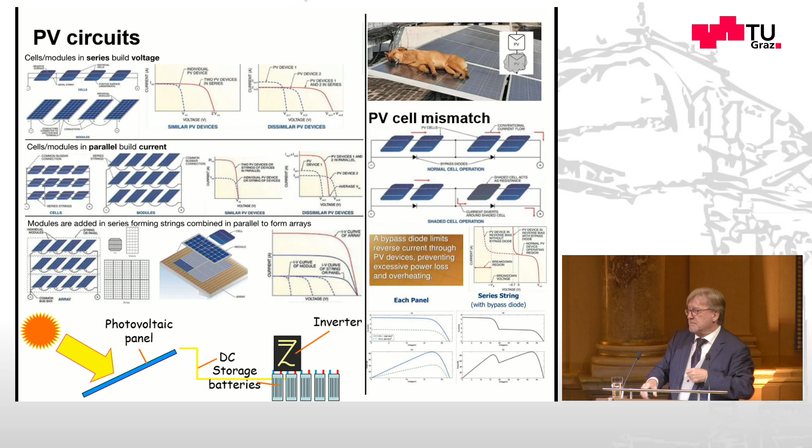Okay. Then just looking at the issue of photovoltaic efficiency. If you take it from a physics perspective, you've a limit of 32% for a single junction, for one exciton per photon, relaxation at the band edge. And that is the limit of conversion of the solar spectrum to electricity. Okay? But you say, you know, solar cells that do 40%, 50%, etc. Because what they do is essentially say that limit doesn't apply.

So you either have multiple gaps, okay, or you have multiple junctions. So the light, for example, is going through one solar cell, producing electricity there. What isn't collected by the cell goes to the next solar cell and produces electricity there. And thus you're having that 32% limit repeated a number of times.

You don't actually have that limit repeated a number of times, though, because you've got an optical loss in the first one, you've an optical loss on the second one, so multiple junctions tend to be not that multiple, because by the time you get to the last one, there's very little light available, okay? Similar things apply, but in a slightly different way for multiple gaps, okay?

Then you can use various forms of concentration. You can use an optical device, okay? Mirrors, lenses, okay? Problem with that is you can only concentrate direct solar radiation, so that's radiation you get on a sunny day. So when you have a diffuse day, I, as you will notice, come from Ireland. Ireland, its main dominant characteristic of the climate is it rains a lot, so it's cloudy, so you have a high diffuse condition. An optical concentrator would not be a good idea, okay?

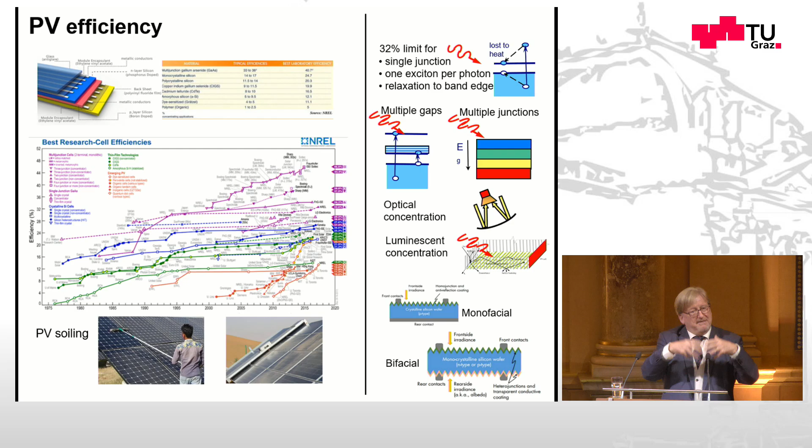Now, interestingly enough, this presents a big sort of standardization problem, because do you say, when you work out your efficiency of a bifacial cell, do you take the front side, or do you take the front and the back side, and then the back side is not really collecting as much because it's facing downwards, or do you say, well, per volume of cell, we're collecting this energy? So it causes existential angst for standardization people when they see a system like that.

But nevertheless, you get the idea of a bifacial cell as another way of effectively making better use of the material. So there's various ways that you can exceed that limit, but you're not really exceeding that limit. You're changing the context of that limit. And that will give you these graphs.

This is a much repeated graph, annually updated from the National Renewable Energy Laboratory, NREL in the US, which is showing you the efficiency increases of various classes of cells over time. And you can see lots and lots of improvement, lots and lots of technologies. Big health warning to it, though.

The real cells you get, even under the particular test conditions that this graph is produced, are between 10 to 50% less efficient. In other words, the half. So the real practical devices aren't quite improving at that rate.

And also, there's a huge range of technologies there, but if you look at real solar cells, they're primarily monocrystalline silicon, some polycrystalline silicon, some thin film, and only in very specialist applications are the other forms of cells taking significant market share. That is likely to change, and tandem cells that have perovskite and silicon and dye sensitized, etc., will emerge over time. But at present, that cell spectrum there does not represent the spectrum of things that are commercially available.

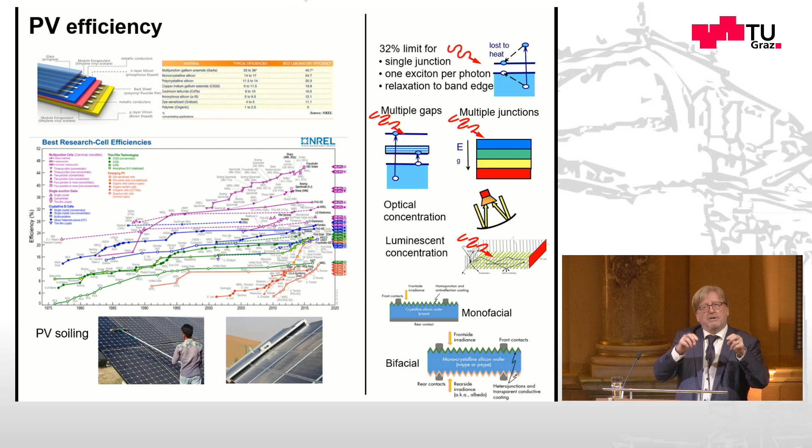The final thing I'd say about efficiency is the issue of PV soiling. You see at the bottom there, on the left-hand side, someone cleaning a PV module with a bucket and a mop. And also you get automated cleaning systems. Now, where solar energy is abundant, it tends to be dry, so it tends to be dusty. So dustiness and high solar radiation tend to be linked. And dustiness will cause soiling on a cell.

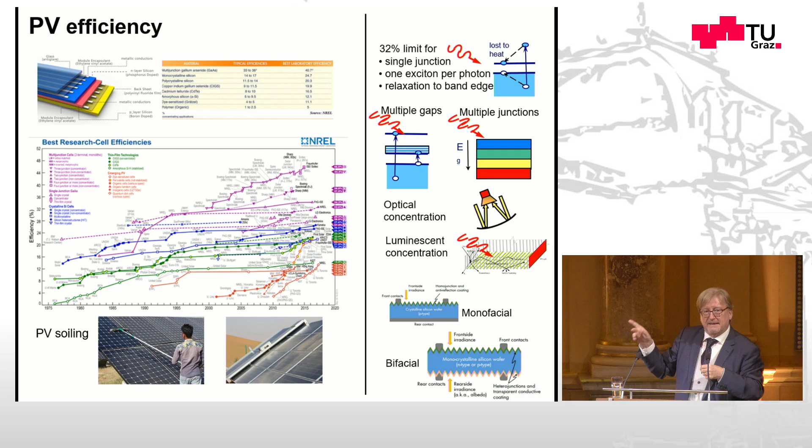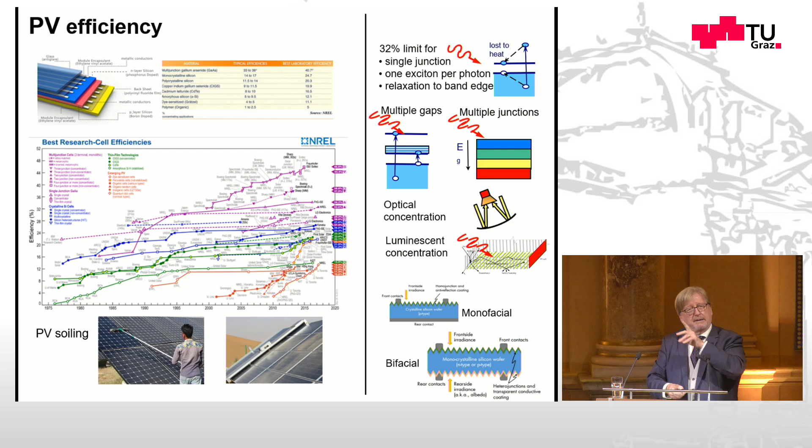Now, wind will remove that soiling, so you end up with a residual level of soil that exists over time. So basically dust on the cell. And you can clean the system, and you can automate that cleaning, but you can also simply oversize the system to allow for that. So again, where that comes in terms of efficiency is another interesting factor. All these things influence applications and context, as you'll see later.

Then the other big area which has influence is thermal management. Solar cells sit out in the sun. A solar cell's efficiency goes down 0.5% every degree Celsius if you look at a crystalline silicon cell. So it's out in the sun, it gets warm in the sun, and efficiency goes down. It's a big issue. So that would apply to the crystalline cell.

Interestingly enough, for dye-sensitized cells or for a thin film cell, it's a much more complex situation. In fact, for a dye-sensitized cell, there's an optimum temperature. So you want to operate at a particular optimal condition. But generally what you want to do with silicon solar cells is try to keep them cool. And that presents a number of challenges.

And the bottom graph, by the way, shows you the variation of temperature with solar radiation. And it also tells you there's a large amount of scatter with that variation. Why that happens is because on a daily basis, your solar radiation has a sinusoidal pattern, but the ambient temperature is displaced by that. It's colder in the morning than it is in the afternoon. The day takes time to warm up. So you get a band because of that effect.

You also get a similar band over the year because the autumn is warmer than the spring. So the year takes time to warm up. So you end up with this kind of band there. And also because the solar radiation has a sinusoidal pattern through the day, when you look at a linear graph like this, you get this kind of bunching effect. So you get that kind of graph of variation of solar cell temperature with solar radiation. And there's several things you can do about that.

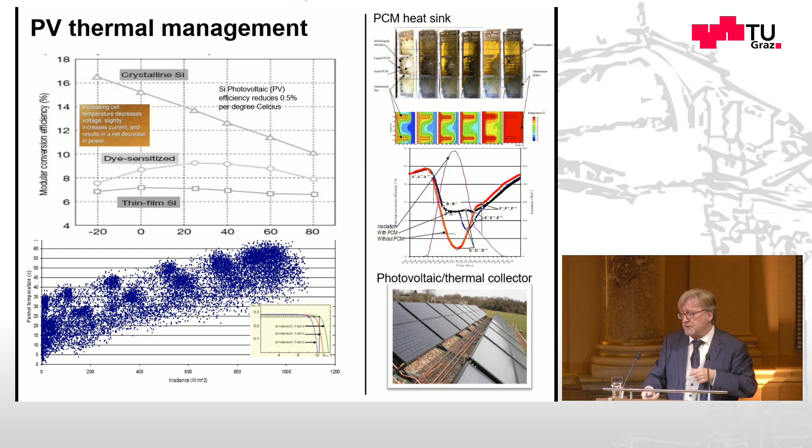In terms of its optimal application, though, you do need an application that both needs electricity produced by the solar cell and can make use of the hot water that's produced. So there's a cost to produce that water. There's a cost of the system itself, and also the cost of operation, etc., pumping the fluid around. So thermal management presents a number of challenges, and we'll come back to that when we look at some of the applications. And then the other thing I would do is energy storage.

Obviously, PV produces energy during the day and not at night. We want energy at night, so you need to store it. So in many PV systems, there will be a battery, okay? But there's many other ways to store, and I look at storage as you've got a where, what, and when question. In other words, where are you going to store it? You're going to store it locally where the PV is, or perhaps somewhere else, okay?

You've got a what question. Do you store it in batteries? Or perhaps you store it in pumped hydro. You pump water up a hill and store it there. Do you store it as sensible or latent heat? Okay, and if you've got, for example, a photovoltaic thermal collector, it's producing heat, so you could do that. Or perhaps you might generate hydrogen and store it as that. So you've got storage options.

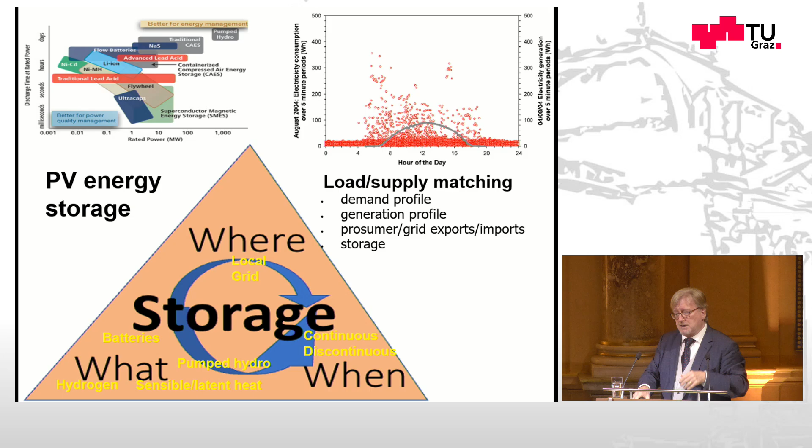And finally, you've got a whole set of issues to do with the matching of load to supply at different scales. What is the demand profile of a particular application? What's the profile of generation? And what's the potential for import-export, what's called arbitrage, in the electricity system? So a whole range of issues come into storage as well, and again, they'll feature in some of the applications.

One of the interesting things about all of this is that solar PV has become more competitive over time. Production volumes, particularly in China, more recently in Vietnam, Malaysia, India, have meant that system prices are coming down.

That has also meant that installation costs are going down. So you look at the little thing on the left-hand side in the graph, which is the cost of solar farms. They're also going down as installation becomes much more standardized. And in favorable conditions, in the appropriate conditions, PV is competitive with just about any other power generation technology.

Now, it'll vary in very particular contexts in terms of distance from grid, the particular climatic conditions, and all the issues to do with load and demand, what are called capacity factors, that I've said. But nevertheless, it is becoming, in most contexts, economically competitive. And indeed, with recent changes in electricity costs, even more so. So we can talk more about that maybe in the questions.

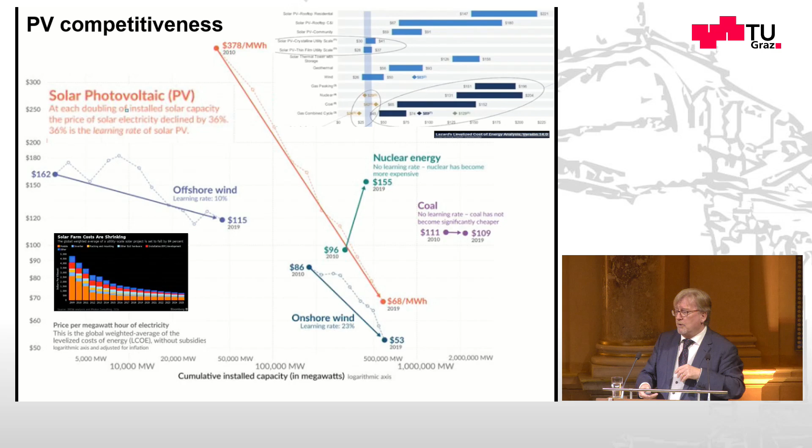The other thing is it's generally environmentally sustainable. And it's important when you look at environmental sustainability to look at the life cycle emissions. If you look at the energy payback of a PV system, it will obviously vary with how much the energy from the PV system is used, how much energy it produces over its lifetime, and also the actual installation energy used, the cost of shipping it from point of manufacture to where it's actually used, etc. Many, many things in there.

But when you add all those up, you look at energy payback periods of around a year. It can be as little as 3 months, it can be as much as a year and a half, but it's that sort of thing, an energy payback period. But your payback period in terms of embodied CO2 emissions can be longer because 70% of a typical PV cell is glass. Glass is an industrial process done at 1,000 degrees C. It has a lot of embodied energy. So your embodied energy payback can be longer than that.

And it's important to keep that low because over your lifetime you're producing operating energy, which has got to pay back that embodied energy. Interestingly enough, it only pays back that embodied energy if the PV is actually displacing fossil fuels. So if it's just adding to the energy production and no fossil fuel gets displaced, there isn't actually a saving of fossil fuels for that embodied energy. So it's important that the systems perspective is also there as well.

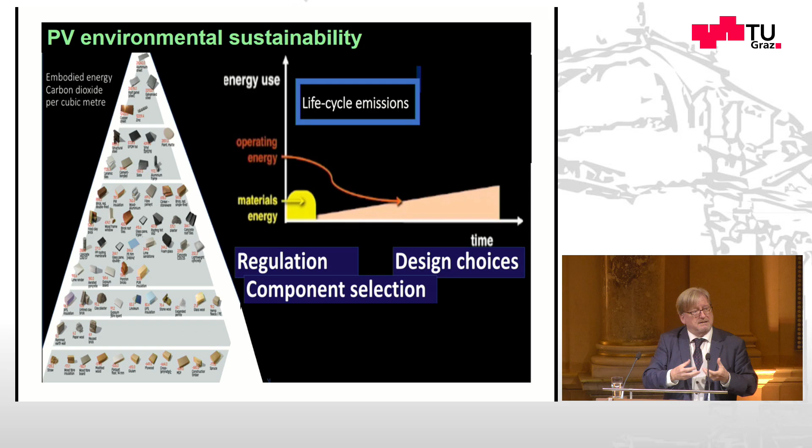Basically, that pyramid there has wood as the most sustainable material and concrete and steel as the least, unless you think about recycling it. And again, the design of the components of the system, the frames, etc., for recycling and reuse, but also design of the PV themselves to self-repair wherever possible, but also to be actually designed for replacement and repair and recycling, because those materials are very difficult to extract and very expensive actually to obtain. Okay.

So, moving on to applications. Applications come in a huge range of sizes. You've got very, very small PV systems that are powering calculators, etc. I'm going to show you lots of those. You've got a lot of off-grid, non-domestic applications. So, for example, telecommunications plants in many countries are powered by PV, through to things that are powering the vaccine cold chain, so the vaccines stay cold all the way to the point of delivery in developing nations and off-grid applications, through to various grid applications, through to very large-scale utility things. So there's a huge range of different systems.

And I'm going to go basically down through a bit of a list of those and then draw things together from there. So we start with PV-powered devices. There is a huge range. Starting off from the top left-hand corner there is my TV controller. Okay, it is PV powered. It has PV cells on the back.

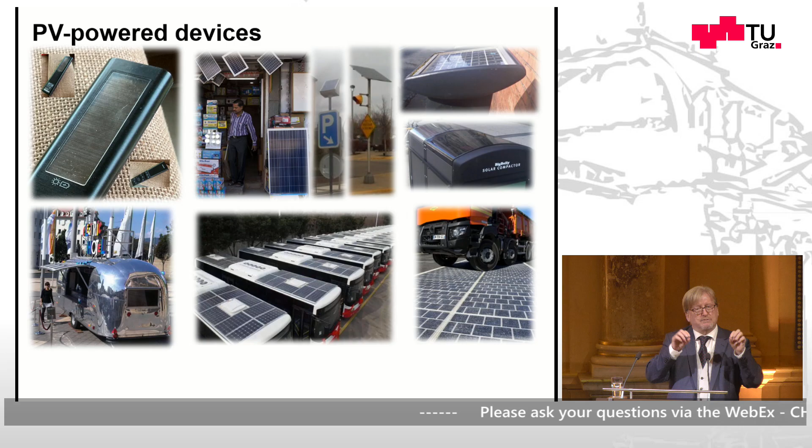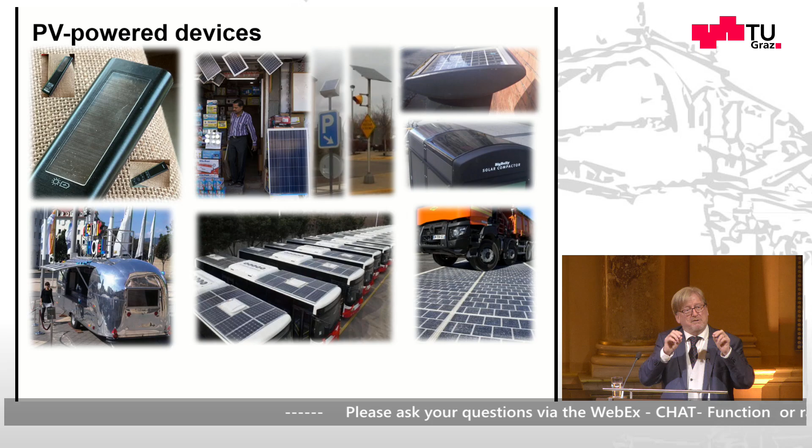And that is the origins. One of the origins of the current use of PV was in two areas: pocket calculators and satellites. And ironically, for the same reasons, the remote autonomous systems. And you want a remote autonomous system; your pocket calculator, your phone, your TV remote, etc., is a big application, and that I think will grow as electronics become more efficient and PV becomes more efficient.

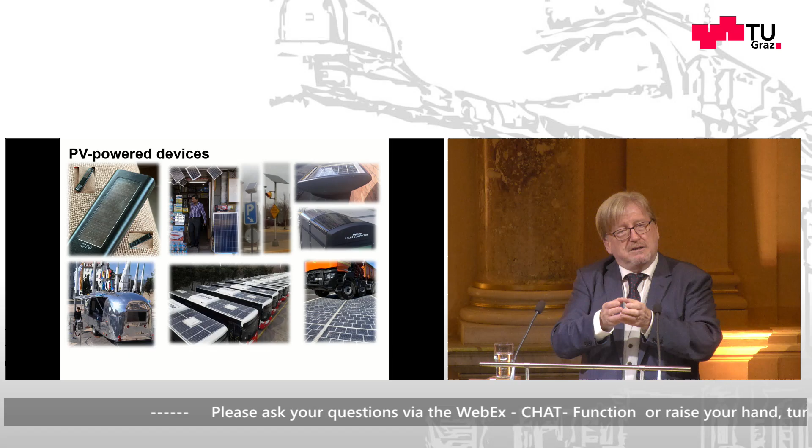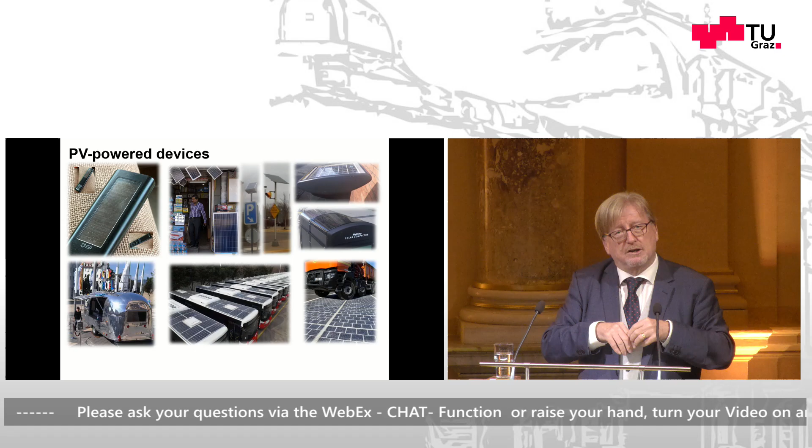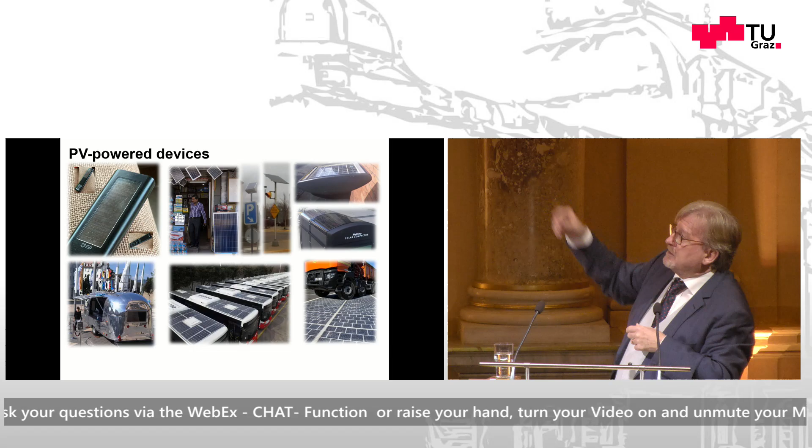You only need to produce the PV energy that can be stored to do the function, so that you don't need to have a match of PV production to end use. You can mediate that through storage. And you can segregate devices' operation so that maybe only certain things happen at certain times. So that niche will grow through to things on the street. See a lot of those, a lot of transport applications.

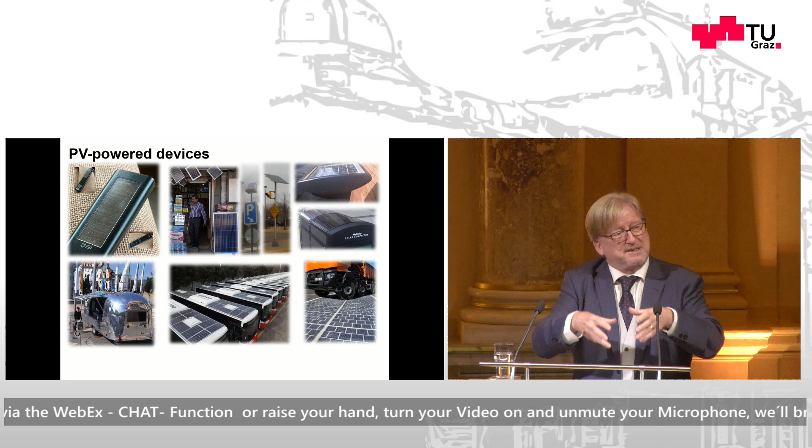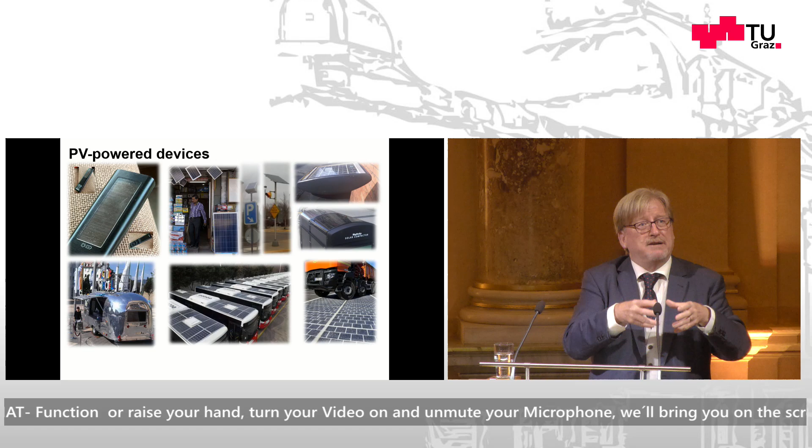And the reason for ones on the street is it's actually cheaper to do PV to power things on the street than dig up the street, put the cables in, get all the permissions, etc. So it's an economic argument. So the reason why you might be using solar water pumping in the Sudan, for example, again, because it's remote and it's cheaper than extending the power lines all the way to somewhere, is exactly the same reason as you will have solar devices in the street in Graz. Okay, it's essentially to do with autonomy and remoteness.

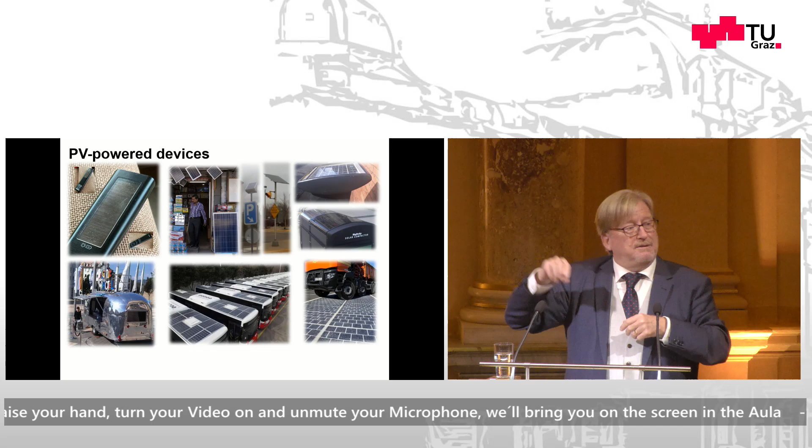Okay, so you see things like solar-powered buses, solar-powered restaurants, paths as well. I wouldn't put a truck on a solar cell, as the picture says here, but nevertheless, paths are a potential application, through to various bits of street furniture. Through, interestingly enough, in the middle there, the second picture at the top, PV cells for sale in India in a shop. And there it's people actually wanting to power their own domestic situation from PV modules they buy retail. Okay, there's a whole range of applications in that kind of area, and an infinity of them.

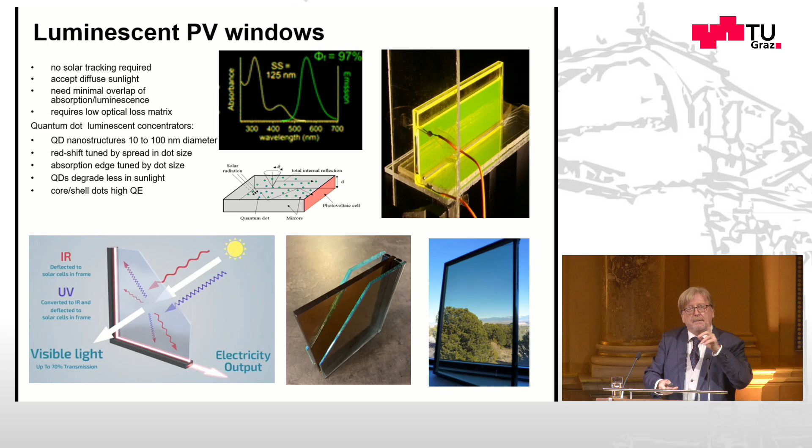Okay? And as you see on the bottom left-hand side there, light comes through the window in the visible range, other wavelengths are transmitted to the edge, and your PV is at the edge. And there are a number of companies commercializing the technology, and you see some examples there. So your PV system is integrated into the window system. Okay, so you say, so what? That's interesting, but not particularly novel. But it leads on to something quite interesting as a consequence, and that's this.

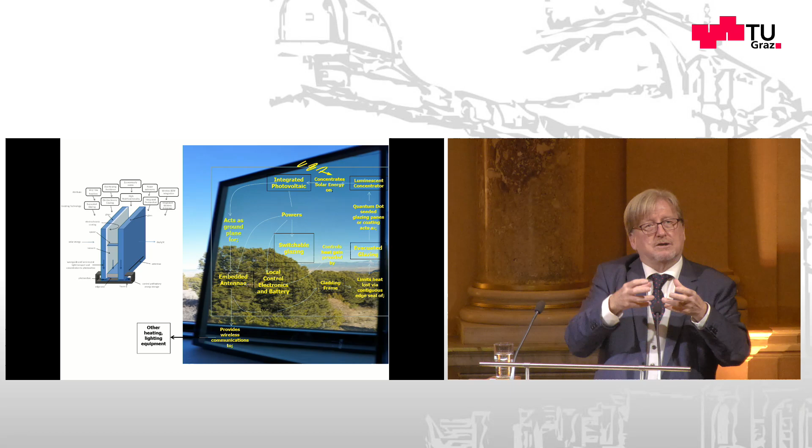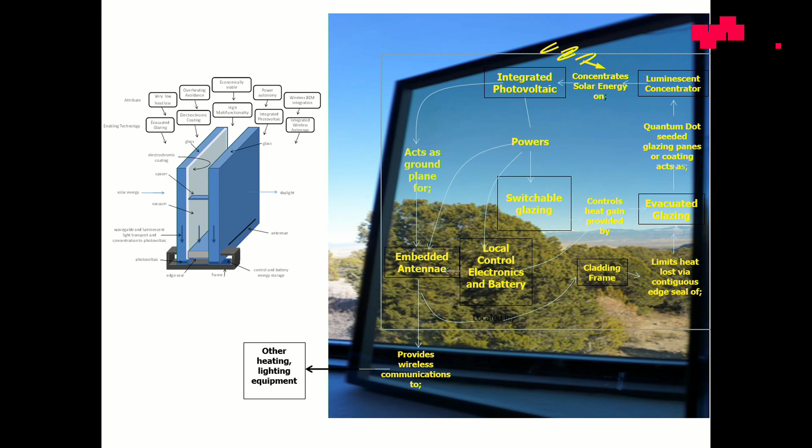In a building, the windows are the point of heat loss, okay? But you want them for light, for daylighting, for vision, for connection to the outside. So you're looking at window technologies now which have very low heat loss. You might have two sheets of glass with a vacuum between them as a vacuum glazing. But then you've got a propensity to overheat at other times, glare, etc. So you then want a switchable component, which you'll maybe switch electronically. And that can be powered by photovoltaics at the edge of the window, okay? That leads to the idea of a window as an autonomous system in itself. That has advantages because you simply install the switchable window and you don't have to power it.

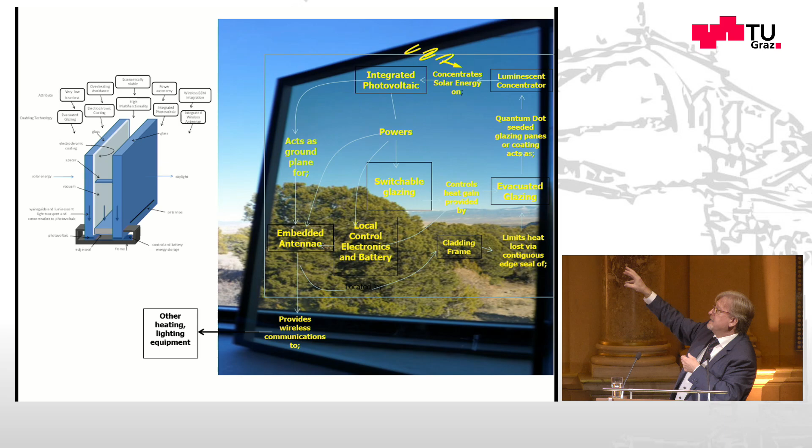So your window will have PV, it will be switchable, it'll be insulating, it'll probably have a battery, and it'll have an antenna. And the reason it has an antenna is when that window switches, it needs to be able to tell the heating system that it needs to come on, or it needs to tell other components of the building which also have Internet of Things components to do things. So you get these complex interactions of the integrated photovoltaic, the luminescent concentrator, an evacuated glazing, a switchable glazing, etc., as an integrated system.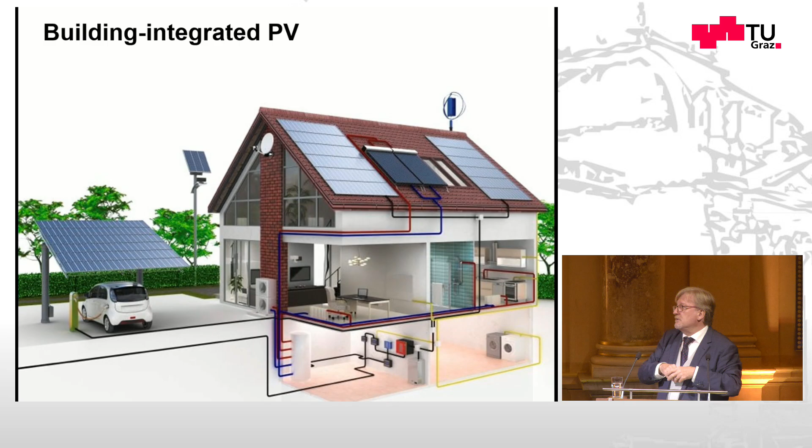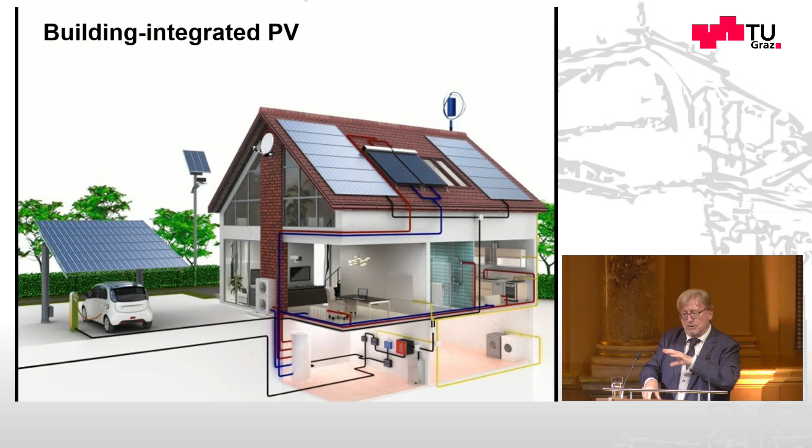In this case, the PV is also powering a heat pump, so it's getting into the heating of the building. And also, you'll notice I put a solar water heater on there, because PV and solar water heating are actually competing with one another for area on the roof. And solar water heating is more efficient than PV for producing hot water. So if hot water is one of your goals, that needs to be seen as part of the system. So you're seeing a range of technologies that need to be integrated in the building.

That leads you on to the idea of the net zero energy building, that at certain times of the year, you're producing enough energy to sell to the grid, and at other times of the year, you're buying from the grid, okay? And that was established very clearly with a lot of national measures to stimulate the PV market, using what were called feed-in tariffs, where the economic viability of a building integrated PV system was dependent on selling the energy to the grid at a particular tariff. That was a market stimulation measure and wasn't meant to be there permanently.

And as those tariffs have been removed, the cost of PV has in the meantime gone down. People are now saying, actually it's better for me to use my PV energy myself rather than send it to the grid, okay? And store the energy, so battery storage rather than being dependent on the grid. But there still might be times when you don't have a load yourself, so you might as well send the energy to the grid.

And that means you've moved from systems being dependent on a feed-in tariff for their economic viability to the owners of those systems proactively managing whether they use the energy or sell it to the grid, so-called prosumers, consumers and producers. And creating that idea of prosumers is part of what building integrated PV actually does. Now, whether you actually do it yourself, or you sell that right to an aggregator who does it for you, or you have some app or whatever, it creates a whole lot of other criteria.

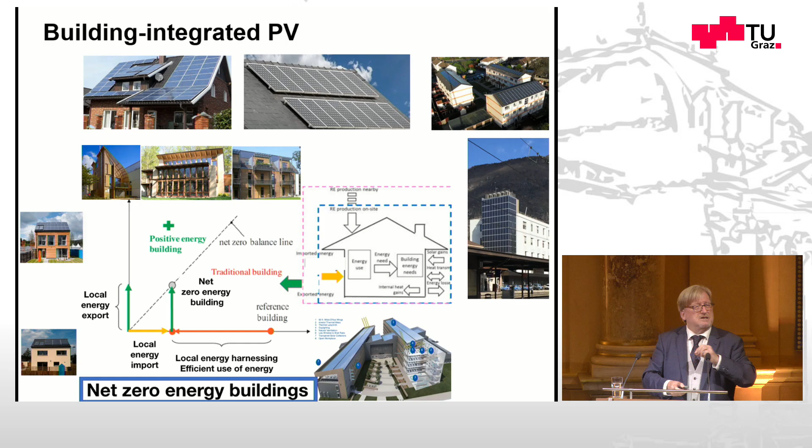The other thing I'd just say on this slide, all these buildings have got, as you can see, PV on them, domestic, non-domestic, different countries, but they're totally different styles. And one thing I would say is that building integrated PV is architecturally agnostic. You can integrate it into any kind of building, and I think there's some evidence of that. And by the way, I haven't shown it on this one because it just complicates matters, but you can also now get PV in a whole variety of colors and textures as well, so all that's doable.

You also have standalone arrays, and they're particularly common as power for electric vehicles. And you see various installations here. Don't have time to go into it, but there's a whole lot of interesting issues to do with the design options of electric vehicle charging stations. What they take advantage of is that solar energy, one of its characteristics, aside from not being available at night, is the low power density. So you distribute the collection of solar energy, obviously, but also it's appropriate to distribute the use of solar energy so that you're not needlessly moving it around and incurring losses in doing that.

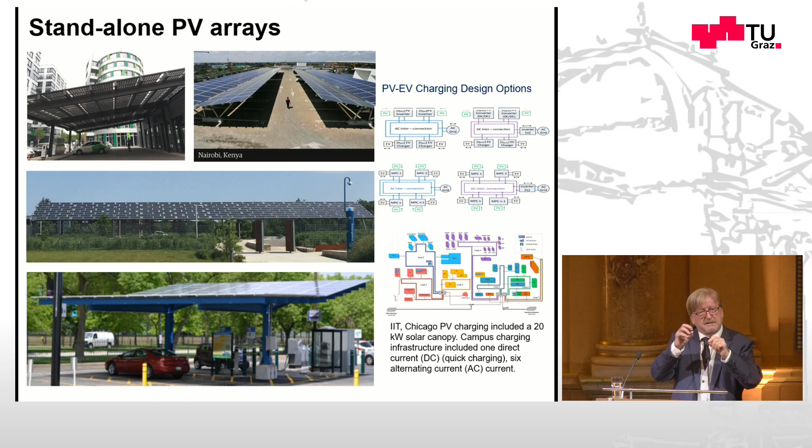So the idea of powering electric vehicles in a range of locations, but then linking that with ideas of perhaps vehicle-on-demand services, so that you take the charged vehicle, means you can optimize the charging profile. So you don't take your own vehicle and charge it, but you link it with vehicle-on-demand kind of services. And then you've got a match of load to service coming through. And many examples here from Nairobi, Berlin, Chicago, and actually up in New York State in the middle there, of different systems of different designs. So that's become a very common application, standalone arrays.

Also quite common is PV water pumping. Again, remote locations, agriculture, etc. And this brings an interesting question, which goes to that where, what and when of storage. What do you store in this system? Do you store the electricity or do you store the water?

Okay, in other words, you pump more water than needed and have a big tank, and as long as you can cope with evaporation, etc., you store the water, you store the end application. And there are pros and cons in particular applications. And interestingly enough, the graph there is a little out of date now.

That was calculations we did for Jordan, the country Jordan, in terms of the economic viability of diesel generators versus PV. And what's happened with the price of diesel is now PV wipes all the other applications out, and it's better to have a PV water pump than any other kind of water pump globally. And irrigation, and particularly provision of water for nomads, etc., is an important part of this kind of application.

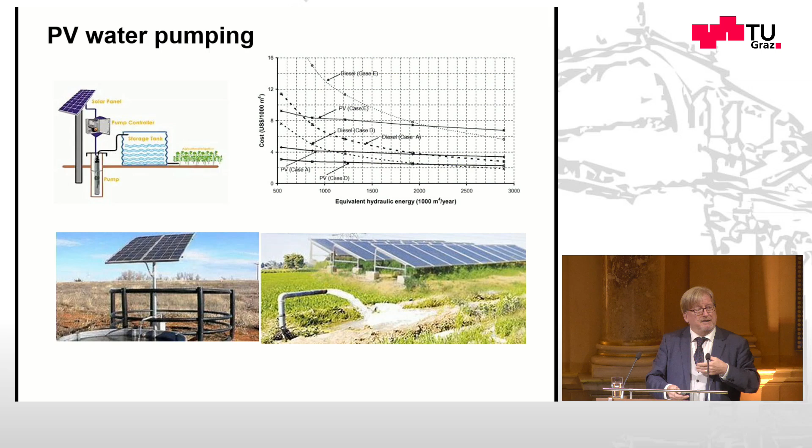And it started off primarily in a developing country context. You'll now see PV water pumping in North America, in Europe, etc. It's a very readily sensible application.

Then you have large-scale grid-connected PV. Lots of it, gigawatts of it throughout the world. The one on the top left-hand side, the largest in the world when I last looked, was in Tamil Nadu in India, but I suspect tomorrow there'll be yet another one somewhere else that's even bigger. And these use vast amounts of land. Their costs have been shrinking because as they get bigger, you get bigger scale, etc.

You need large amounts of reasonably flat land. That large amount of reasonably flat land needs to be near a grid, and you need to have access to the kind of facilities to maintain those systems over time. Okay? But the land is the critical issue. And in many countries, either your land is limited and there's competition from agriculture, or there's competition from housing.

If you think about Japan, for example, there's a spine of mountains and a very thin strip of flat land, so this wouldn't be appropriate for Japan, or South Korea, for example. So other options become available. So that competition for land has spurred a lot of other possible ways of looking at PV, and has led to some quite surprising co-benefits that have emerged.

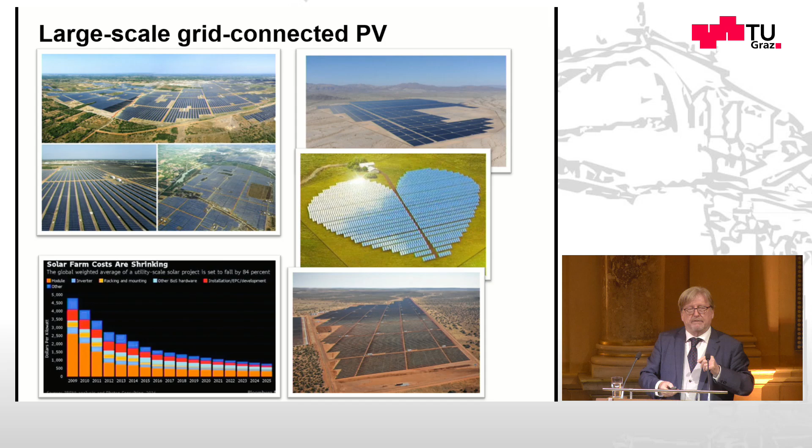To pick a couple of examples, the first one is what's called agri-PV. In other words, rather than your PV displacing your agriculture and covering that land, you're trying to work with the agriculture. It has a number of interesting effects, okay? Your plants are shaded. They need less water. So if you're using some of that PV to do the water pumping, less water needs to be pumped, less water is lost.

You're also, going back to the thermal management bit, cooling the panels. So your PV is working more efficiently, okay? And the cooler panels capture more energy from the sun because they're working more efficiently. Also, when you look through that system, if you take in a greenhouse, there are essentially three kinds of systems.

You can have vertical systems where the tractors go between them. You can have systems that go above and you change the angle, or you can have systems in greenhouses. And many greenhouses are actually shaded, okay, to avoid excessive solar radiation. And now you're both shading, and that shading is collecting solar energy for you to power things.

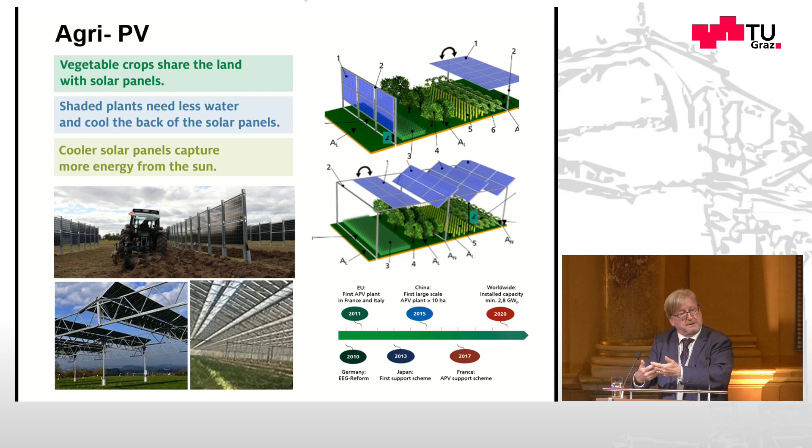So the idea of PV working with agriculture is not displacing the land anymore, but it's actually giving a whole lot of co-benefits, both for the agriculture and much more electricity from the PV system. Another interesting example in a similar vein is floating PV.

And I mentioned Japan. So Japan has a very coastal strip, which is where everybody is, okay? And there's competition for land. So you're not going to have those very, very large solar farms. So ideas of putting things onto lakes, into bays, at sea, etc. Similarly, there's a big program in France, a program in South Korea. I'll come back to that in a second.

So you've seen this kind of system. Essentially, you've got a whole set of floating systems, moorings, a set of converters, and the photos there, you can't really see them, but I'll show a lot of photos just so you see there are a lot of these systems.

These are not unusual in the slightest, okay? The South Korean example, though, is an interesting example of something else which is an issue. A lot of these systems are in one way or another incentivized with, for example, a feed-in tariff, as I mentioned. One of the problems in setting those tariffs, as you noticed from the earlier graph, is that the cost of PV has been going down. So you set the tariff at this level, and the cost keeps going down, and people make a lot of money. So it's important to set those tariffs very tightly.

And there's a lot of floating PV in Korea because they set the tariff at a particular level that made it very, very attractive indeed. So you can artificially create markets in this area. The same happened, by the way, with smaller scale, but still solar farms in the Czech Republic and in Spain. Tariffs were set at the wrong kind of level. So when you look at incentivization, it's an interesting one in terms of the unforeseen consequences of doing certain things.

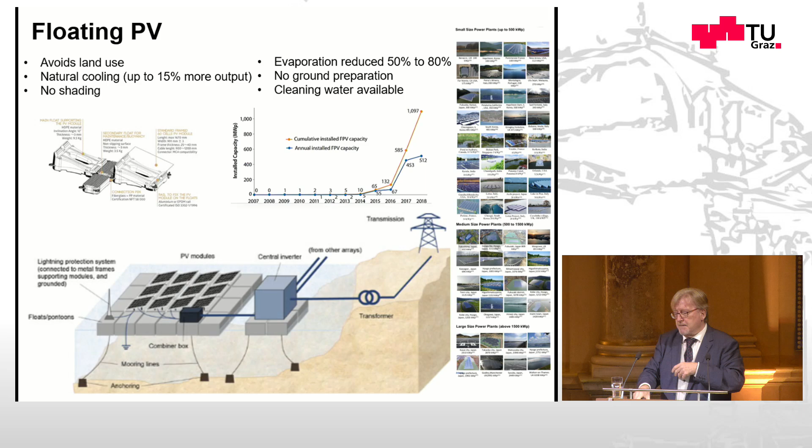And then before I move to concluding the discussion, I want to discuss a totally different area of application, just to show you that there are bits of left field. And that's thermal photovoltaics. Most photovoltaics are using energy from the sun. There are some that are using energy from lights within a room, for example. You can use different photovoltaic materials that use the energy from an industrial process working at, say, 1,000 degrees C. That gives off radiation, and you can absorb that.

But interestingly enough, as I mentioned, photovoltaics can be inefficient because of those limitations to do with spectrum. Here you can match the emission to the thermophotovoltaics and get very, very high efficiency. So effectively, you create your own sun, with something that absorbs the heat from the furnace and re-emits with the spectrum that exactly corresponds to what the PV would like to absorb. And you can do that in a variety of ways in a thermal photovoltaic system.

This has particular potential for the decarbonisation of high temperature industrial processes: cement, glass, metallurgical processing, working at 1,000 degrees plus, because you've got a solid state device that is directly producing electricity. So you haven't got all the things of an organic Rankine cycle, lots of pumps and systems; no moving parts. And the reason I mentioned this one is part of the work I've done on this is creating a spin-out next year called PyRamp, which is developing these technologies in that kind of application. So you're looking at other classes of the same technology, which have nothing to do with the sun, contributing to overall decarbonisation of industrial processes. Okay.

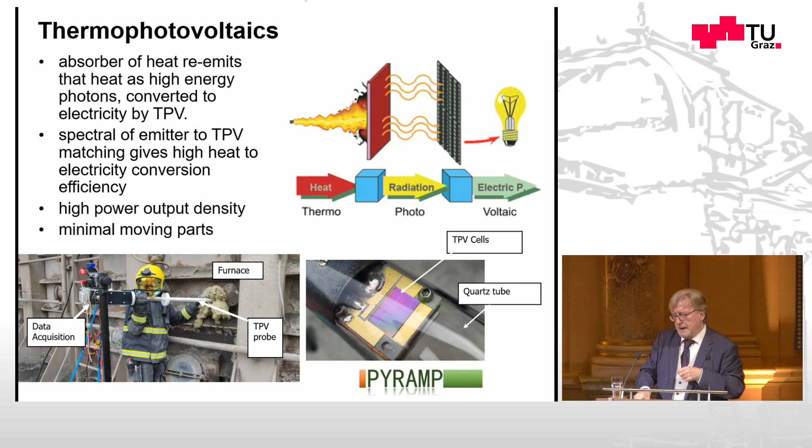So, having given you a very quick run through some of the contexts and some of the applications, I want to draw that together with some conclusions and then be available to answer questions. My primary conclusion is that you've got this variation of scale. You've got things that go from the device level to the component, standalone to utility scale. And you've got a whole range of different storage options.

From the local, with the device storing in a battery through the day, through to the utility scale, you've got storage options from local to grid. You've got battery storage, but you can also be storing as hydrogen. And the reason you might store as hydrogen is that one of the big issues for utilities is how they meet the electricity demand in the depths of winter.

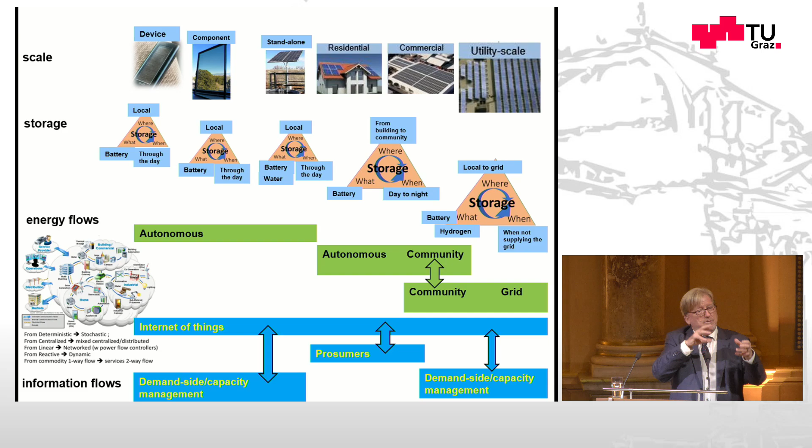And you might want to be producing hydrogen when you can in the summer, storing it through the year, and then using it so your grid, your utility continues to work in winter. So you might be producing hydrogen, when you're not supplying to the grid. So those things change as you go through that system. And your energy flows are also different.

With my TV remote, the top left-hand side, through to the solar water pumps, the windows, they're autonomous systems. There's no connection of the energy flow to anything else. But when you look at things to do with the residential PV, the prosumer, who's producing and consuming, to the large-scale floating solar, agri-solar, solar farms, they are connected to the grid. Their raison d'etre is to supply the grid. So they're intimately connected. So you've got a variety of things there.

But even though PV systems are not connected, they're connected in a different way. As I mentioned, you're looking at the idea of autonomous window systems that connect with other systems in the building. So they're part of an Internet of Things connection with other devices in the building, to your washing machine, to your lights, to the control, etc. One day they'll take over the world. But you know what I mean? All those things can talk to one another.

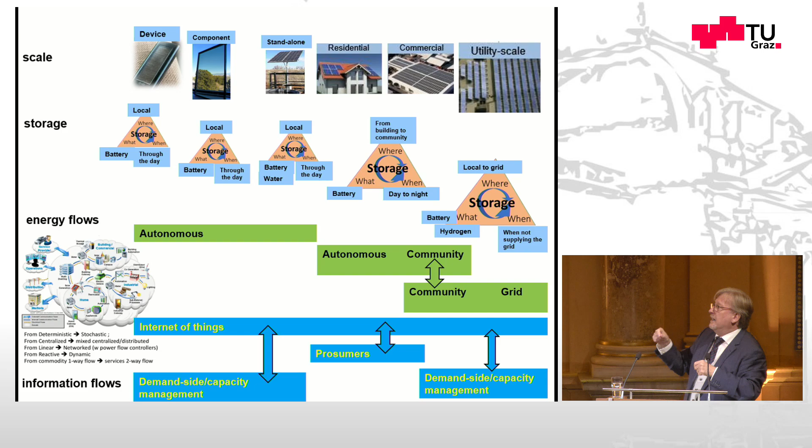Your device, if you've got a mobile phone, has an information flow with other mobile phones, and it might be solar powered. Your TV remote is connected to the TV. So there's an information flow to other things. And that's interesting because that information flow can go to systems that are connected. So although they might not be connected to the house that has the window that's able to insulate the building and change its properties, that window system knows the energy use of that building and can convey that information to a grid, which then has much more knowledge about what the grid needs to supply to buildings. So the information flow is as important as the energy flow itself.

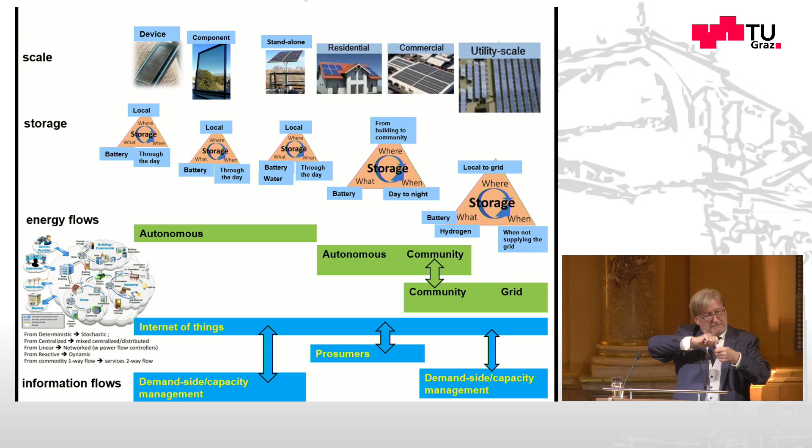And it enables you to look at demand-side management so that you know how the demand profile merges over time. It enables the prosumers to have the information as to when to sell to the grid and when to buy from the grid. And it does a similar kind of demand-side capacity management at the large scale as well. So, for example, your large-scale PV system, to get a high capacity factor, may have batteries or hydrogen storage at the PV farm location so that it's supplying the grid whenever it wants, not just when the PV is generated from the sun. And so when you draw a boundary around that system, it has what's called high capacity factor, high availability, and the project from a financial perspective is more bankable. So your information flows are important.

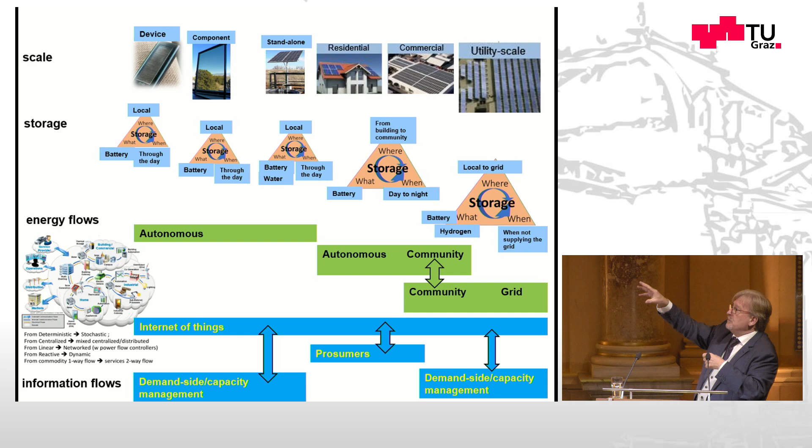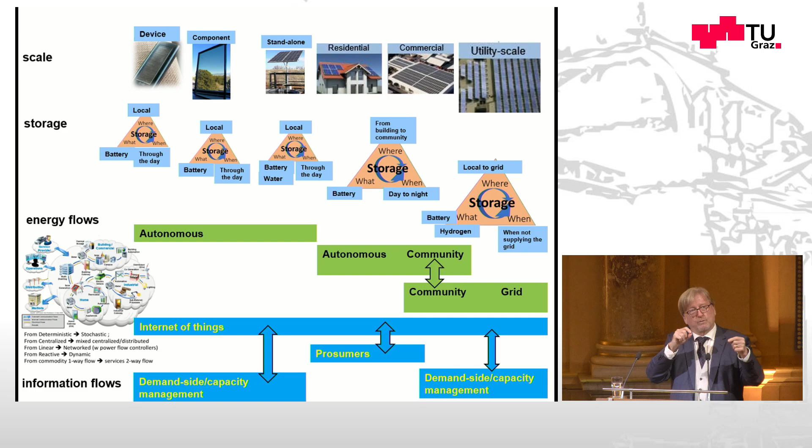So although these systems seem very, very different, and they are very different in terms of scales and application, they are intimately linked in terms of how a sustainable future will be created and how systems have to work together to provide the comfort and amenity that people actually want, as well as a sustainable future.

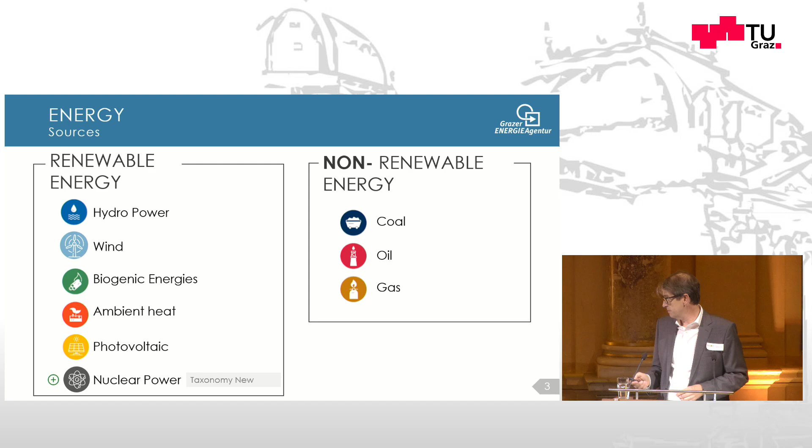This is the wrong presentation, but you all know the energy system and the classification of energy. Renewable energy is the topic I will talk about, and we in Austria were surprised that nuclear power is the new renewable, but in Austria it plays no role. But photovoltaics can play a role in the system, and I will show you the energy flow in Austria. There you can see how it works and how many fossil fuels we need. All the big brown and red streams at the bottom are fossil driven. So when we want to transform the energy system, we have to phase them out. This is a big ambition we have to solve in the future, and we need alternatives.

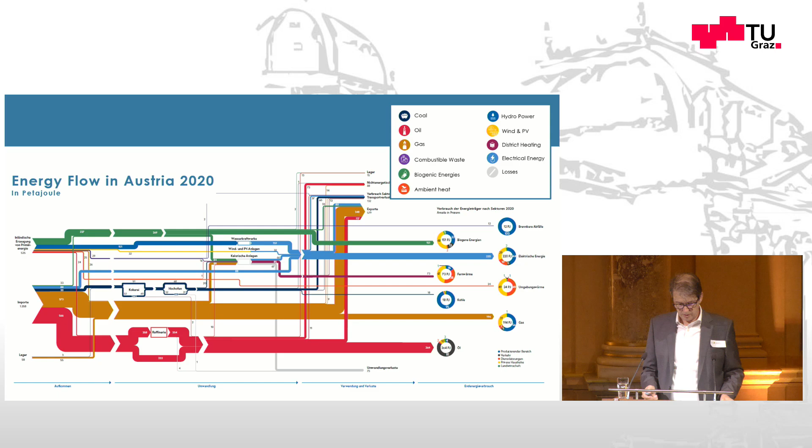And photovoltaic can do it. I will show how this works. For a better comparison between Austria and the European community, this slide: we are all proud of our water power plants and our renewable energy in the system in Austria. We have more than 70% renewables in Austria. When you compare it with the European community, their nuclear power, the new renewables, and coal is 50%.

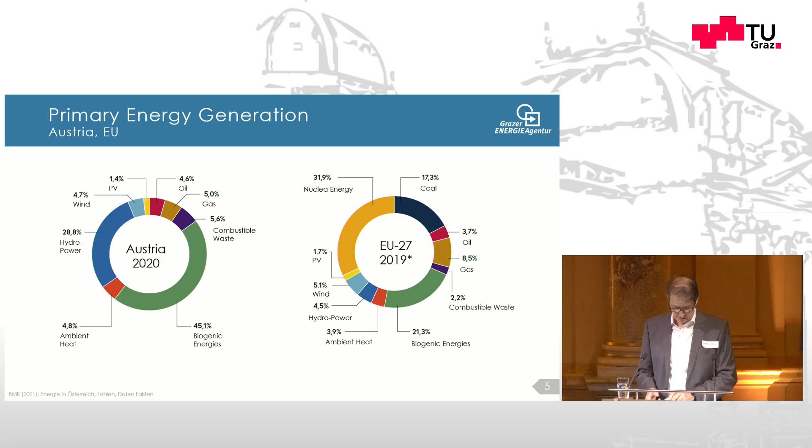So when you phase out these two in the system, it's a big transition we all feel at the moment, and the prices for energy jump every day. I can't even change the slides as fast as the prices go up. So, how does the energy system and the electric generation in Austria work?

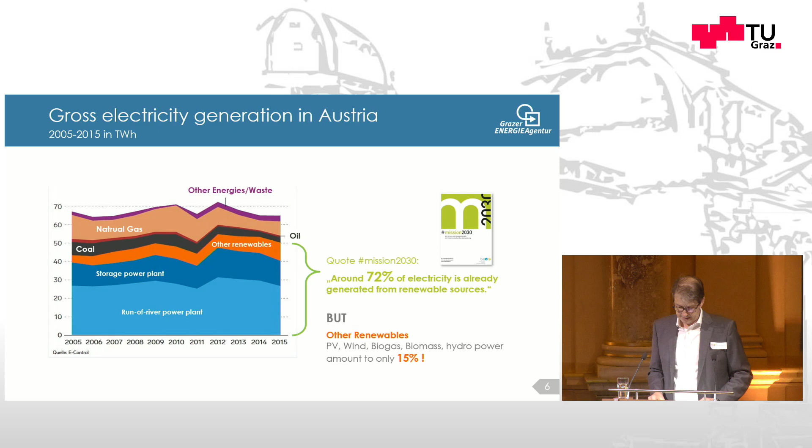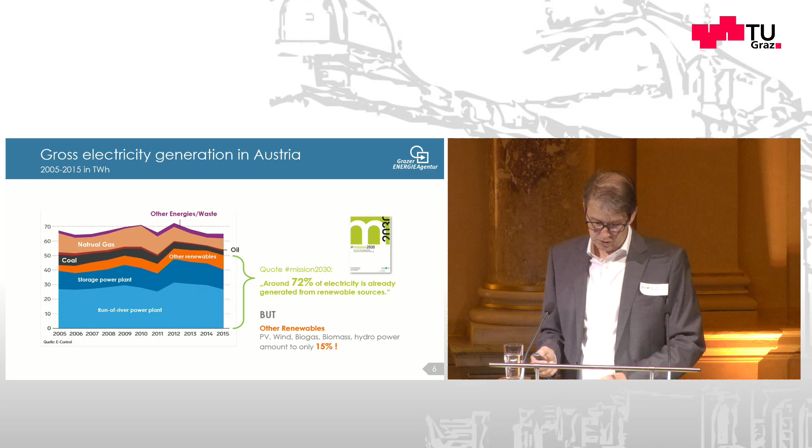72% are renewable. That means that 28% are fossil driven, which we have to phase out. I mention this because we must not forget this sector; we have to solve it also in the future. And in the renewable sector, from the 72%, only 15% is other renewables. So when you change the fossil stream into photovoltaic, you don't just have to double the photovoltaic, we need 10 times the existing system. So we must not forget it, to close the gap for a sustainable future.

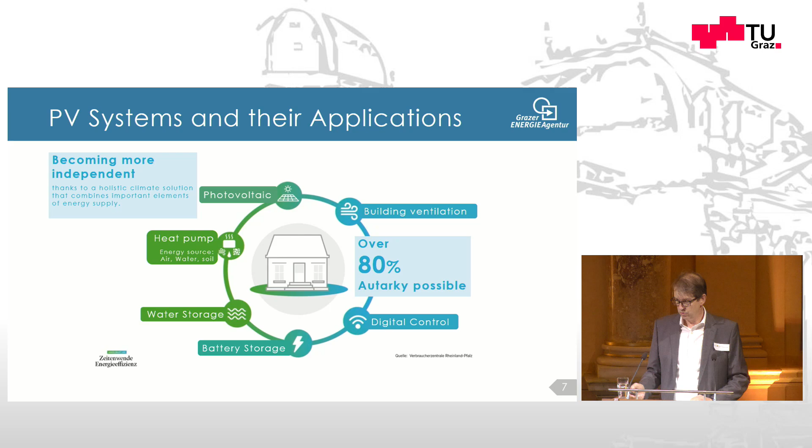But we are moving into a society which is electrical in the future. So I think all our energy needs will be based on electrical supply, and this is completely different from what we are used to at the moment. What does it mean in the forecast? The forecast for 2030 means a plus of 27 terawatt hours of electrical power. Don't forget the 28% in the existing systems, because this is also 20 terawatt hours we need in renewables.

So of the 27 terawatt hours we need, 11 terawatt hours should be based on photovoltaic systems, 10 terawatt hours on wind systems. But what we see after a few years is that the wind power sector decreases instead of growing. Why? Photovoltaic is easier to realize, and with a wind power system, when you try to get it into operation, you need many years to get all the things done, and normally the wind power plant technology is not available anymore when you're allowed to build it.

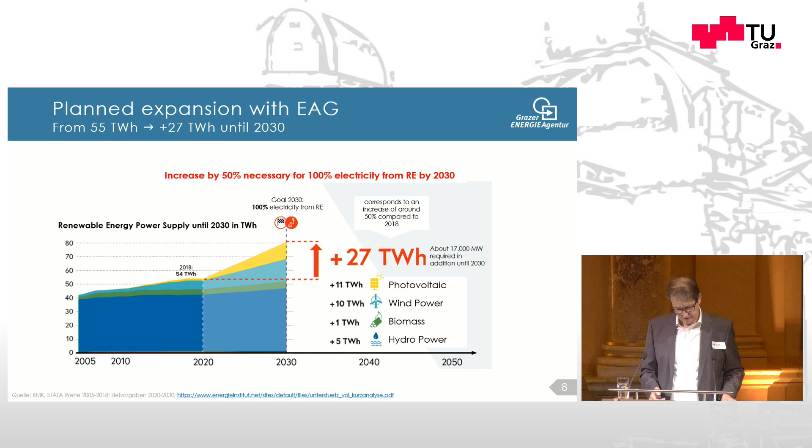So here we have to go faster in the future to close this gap, but this gap is not the end. When we look to 2040, the gap goes up to 65 terawatt hours, and all this is needed in renewables. So all the solar panel producers and everything we need therefore have a big future.

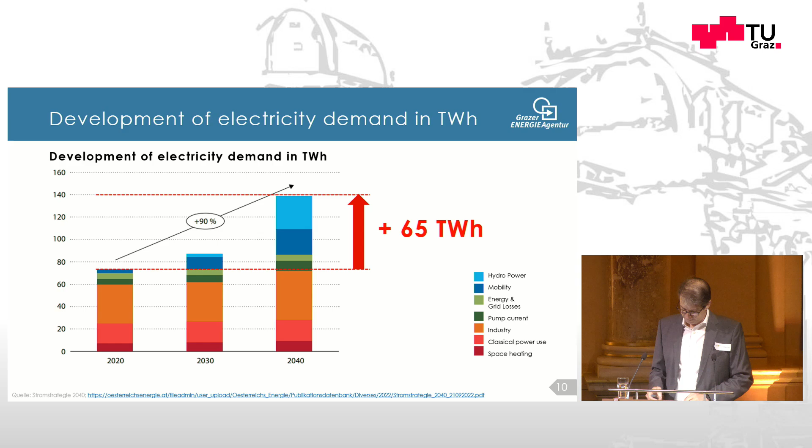What did the city of Graz do? Many years ago, the city of Graz and the Umweltamt Graz did an aerial flight survey to obtain information on the condition of roofs and their gradient, and whether they are suitable for power generation. And if they are, we want an information board where we can classify these surfaces and roofs.

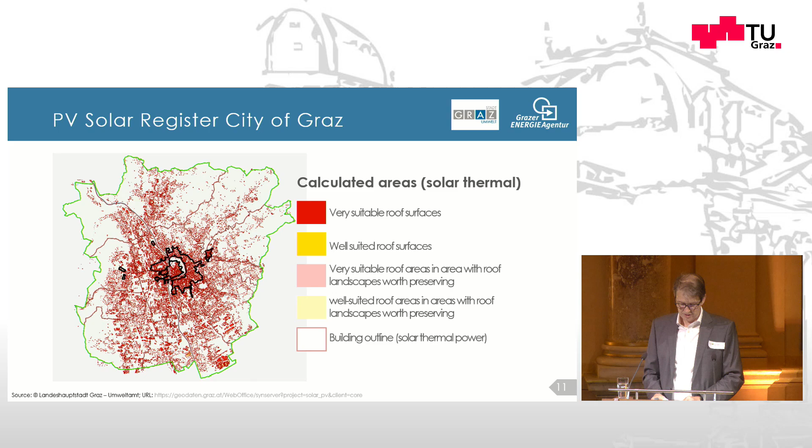And you see the red ones are very suitable, the yellow ones are well suited. And in the city of Graz, you know, Graz is a historic city with a protected city center. In the middle of the city you have protected areas where it's impossible or very difficult to realize photovoltaic systems on roofs.

What information do you get in this panel when you zoom in? You see red areas where it's very suitable for power generation, and yellow ones that are not so good, but also suitable. The first step 10 years ago was made for thermal power, because we wanted to change the district heating system in the city of Graz, and therefore we wanted to know how many roofs we have and which ones are suitable for producing energy.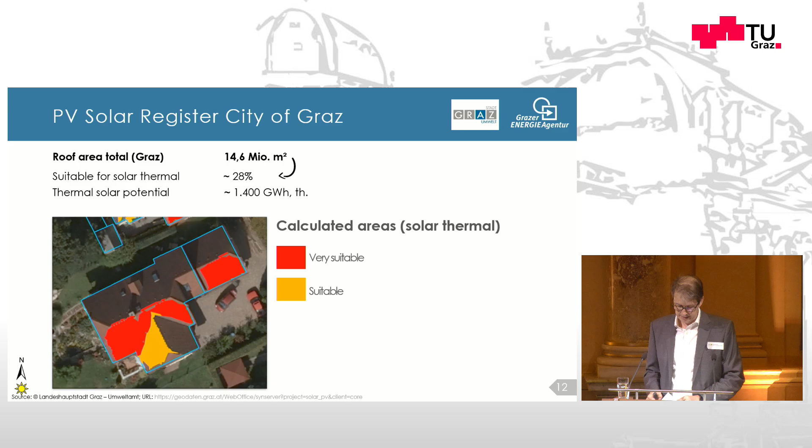So we have approximately 14.6 million square meters of roofs in Graz, and for thermal usage we have 28%, which gives an impact of 1,400 gigawatt hours a year of thermal production. This was also done for photovoltaic, also 14.6 million square meters. We can use 30% of the roofs, and this means we could produce 360 gigawatt hours of electrical power.

Compared with the water power plant in Graz, which normally produces 80 gigawatt hours for 20,000 households: if we use every suitable and very suitable roof, we could support more than 80,000 households. So I think we should use every roof we can get.

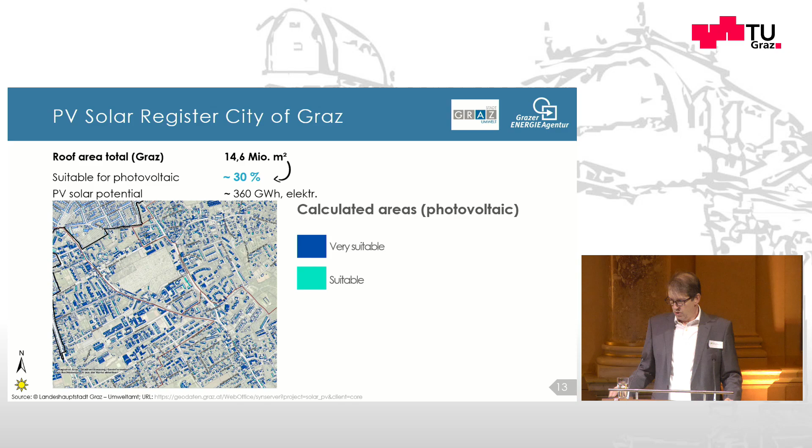So we showed this in a project called Second Life for Batteries. We stored the produced energy in old batteries from electromobility, and this gave a system producing and storing nearby the household. So I want to show you a very good example of a solar power field.

What can you see there? You see the framed area. It's shaded by itself. And Brian Norton told us when the dog is sleeping, you have no power. Also here, there is no power. I start the opinion poll. What do you think? How much energy do you lose with this construction in the shown case? Is it more than 80% you lose? Is it only 50%, or do you think it's only 10%?

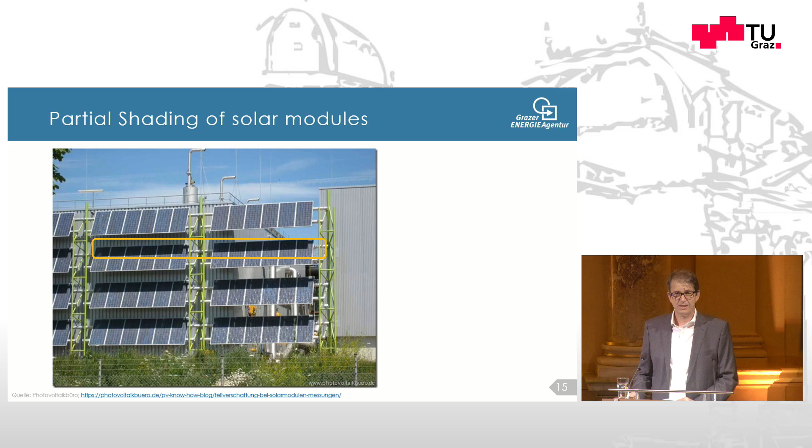So please give me your sign with your hand if you think you will lose more than 80. A few. More than 50? Yeah, thank you very much. More than 10? Okay, I will tell you. You can measure it and you can shade this panel shown. It's measured, and you will have only 5% when you do so.

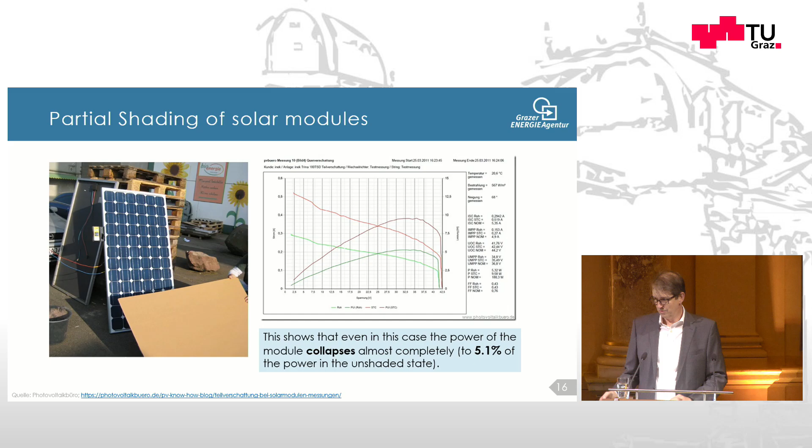So shading is very, very important when you build up a photovoltaic system, and you should look at where your shades come from. So maybe you give the dog a better place for sleeping, or you make sure you have no shades.

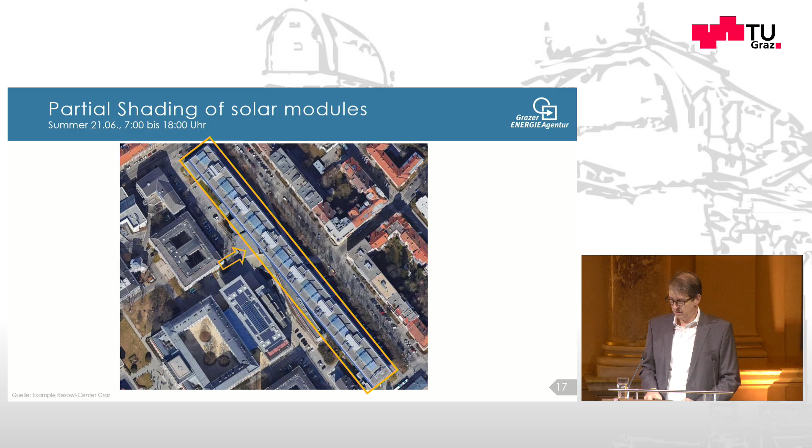This example I will also tell you: we did this survey for the sister university. It's called the Karl-Franzens-Universität, and it's a famous building in the heart of the city, in the protected area. It's called the Resowi Center. It's an aerial view of the Resowi. It's an architecturally iconic building, but it has a very difficult roof with glass, with metal straps and ventilation, and we had to investigate how photovoltaics could work on this building.

And I will show you the shading we made in a digital twin, and therefore you can see the simulation. So the shade will decrease the energy production of this roof, and you have to switch the panels in an innovative way so that you have power for the use you want with a photovoltaic system.

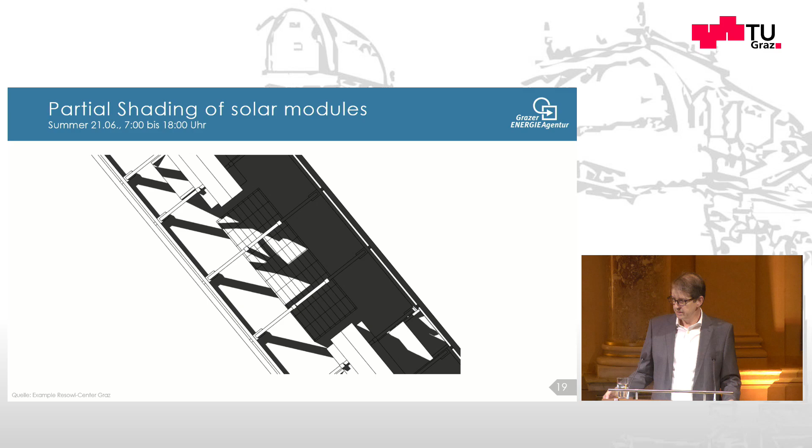So what did the city of Graz also do? Rector Kainz is the chairman of the board of experts, and he decided with the experts that photovoltaic systems could be funded by the Klimaschutzfonds of Graz. So in the last year we funded 330 balcony systems. They're very small systems; the next speaker will tell you more. Most of them are from the company EET. We are proud of it, more than 200 kilowatt peak in operation.

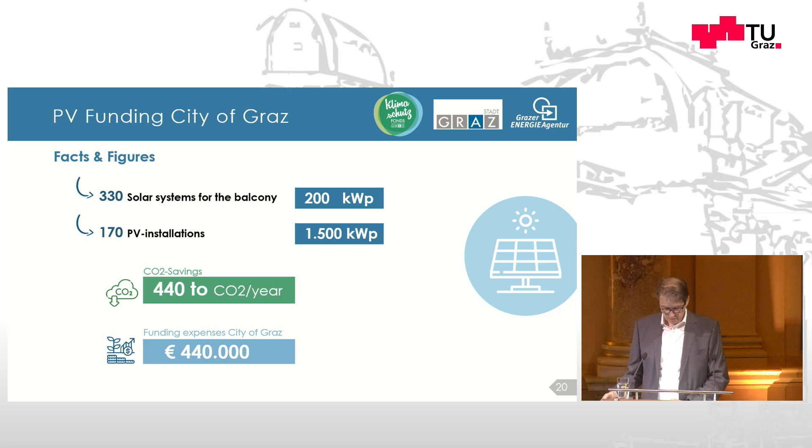And we also realized 170 larger-scale photovoltaic systems on roofs, in total 1.5 megawatt peak. So we could save 440 tons of CO2 each year, and the city of Graz funded it with 440,000 euros. So if you need it, you can use this link for funding, also with the guideline.

At the end, I will tell you about our project. We work on the transition of the mobility sector and the energy sector, which work with each other: from charging electric vehicles, storage in buildings, also producing energy and using old batteries in their second life.

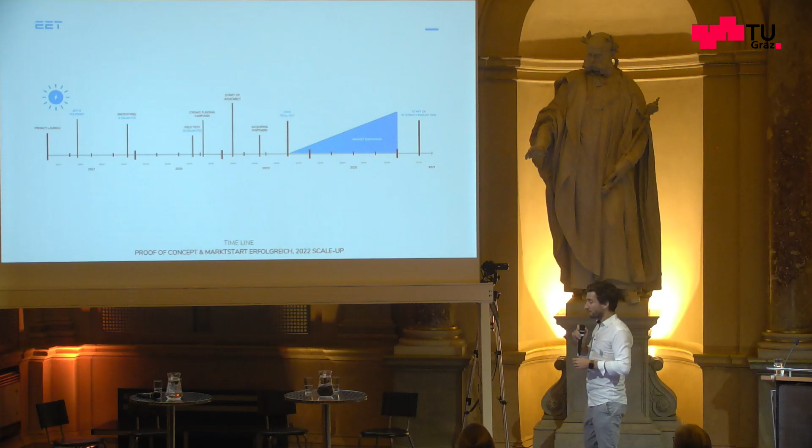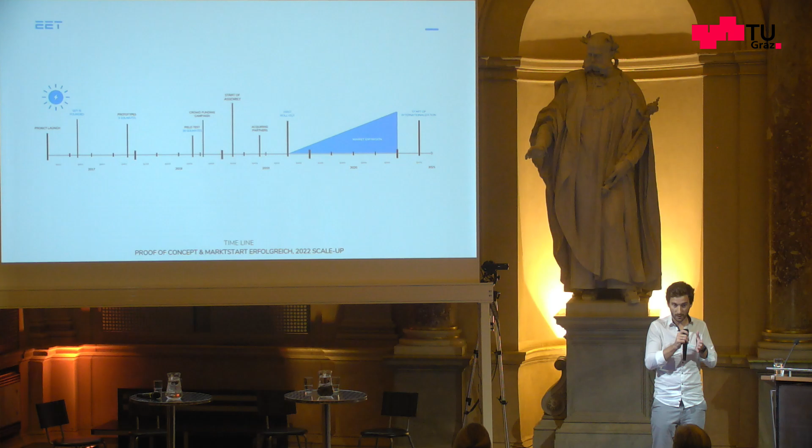Well, coming back to our timeline, what you need to do at the beginning, you need to prove your technology. So you need to prove it with some prototypes mainly. You need to prove that your idea is working in a technological way. When you have achieved that, you need to make the proof of concept of the business model, of the market. So you need to make sure that there will be a customer who is willing to pay for your product.

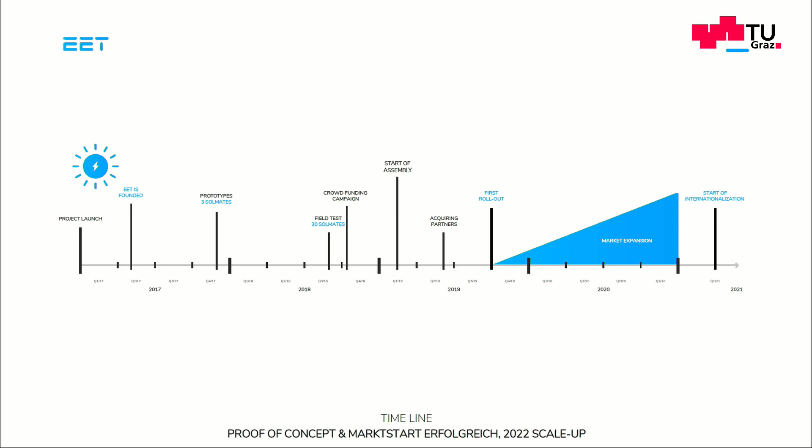And once you have done that, then the work begins. Then you have to do 1,000 things. You have to find a good team. You need to produce it. You need to make sure that you have all certifications. But then you have in principle everything to start up, start selling and get the company going. So very important, these two things, technological proof of concept and then proof of concept of the market, of the business model itself.

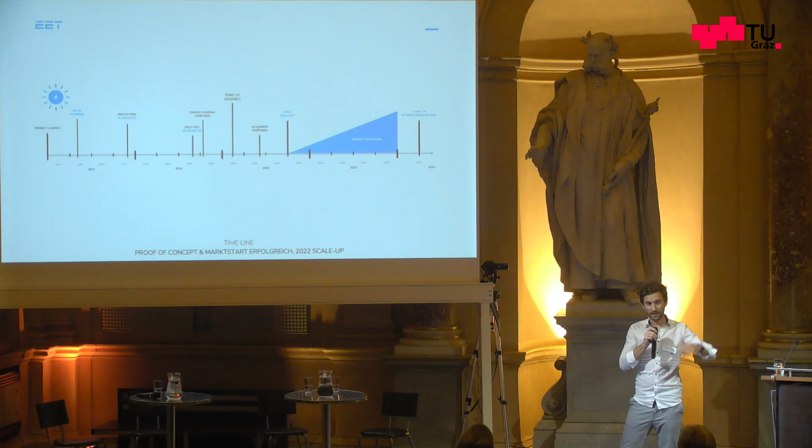That's what we basically did. We built 3 prototypes to prove the technology, then we built 30 prototypes and sold them, and also to test them, and after that we went to a crowdfunding campaign, sold the first 200 devices, manufactured them, and now we are in a continuous growth of manufacturing and selling in Austria, Germany, Italy mainly at the moment, and will be growing in other markets in the future.

Approximately 50% of the team is technologically based, so we have a strong R&D team, and then the commercialization and everything it needs to get it on the street, and approximately the other half is in marketing and sales in the company.

Another very important success factor for founding a company is, are you going to be in a market that is growing, or are you in a market that already has very hard competition? In English there is a very harsh term for that, cutthroat competition, which means it's a competition for price, and if you found a new company, it's very hard to be successful in these kinds of markets.

So try to find a market that is growing fast, so there is enough place for more companies and for growing companies to fill up this market. And what we've done with other universities, with Campus 02 here in Graz, we were looking at what are the megatrends and is our product fitting at least one of these megatrends.